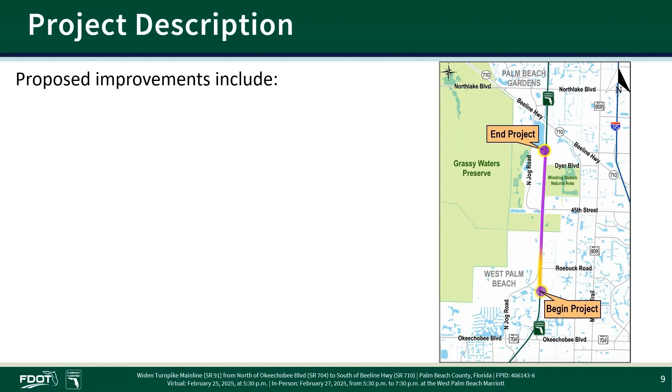The project is located in Palm Beach County, Florida, along the Florida's Turnpike Mainline, or State Road 91, from north of the Okeechobee Boulevard, State Road 704 interchange, to south of the Beeline Highway, State Road 710 interchange. The project will consist of widening the mainline from 4 lanes to 8, and there will be improvements to the 2 cross streets along the project corridor, including Roebuck Road and 45th Street.

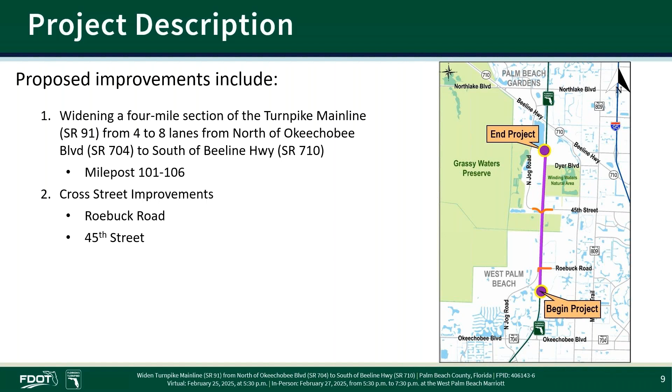This project is following the FDOT project development process. This process includes 5 phases, beginning with planning, project development and environment, or PD&E study, final design, right-of-way acquisition, and finally, construction. The planning phase has been completed, as well as the PD&E study. Our project team is currently working to complete the 3rd phase, final design. During this phase, our project team will be working to implement the original project development and environment study and obtain the necessary environmental permits. The design phase is typically followed by right-of-way acquisition. However, this project requires no additional right-of-way. Construction is the final phase of this project.

In this presentation, we will cover the following: existing mainline configurations, proposed improvements, noise wall policy, and project schedule.

The existing mainline configuration consists of 4 12-foot travel lanes, 12-foot outside shoulders with 10 feet paved, and an 8 to 10-foot inside shoulder with barrier wall separation between the north and southbound directions.

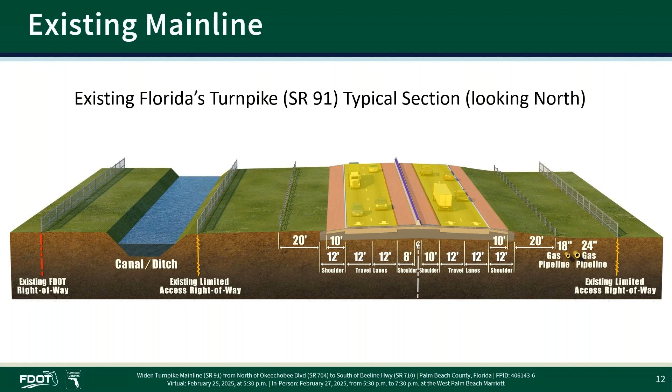The proposed turnpike mainline configuration widens to the west and will consist of 8 12-foot travel lanes, 12-foot outside shoulders, and 12-foot inside shoulders with barrier wall separation between the northbound and southbound directions. The southbound outside shoulder will also feature a barrier wall for most of the project.

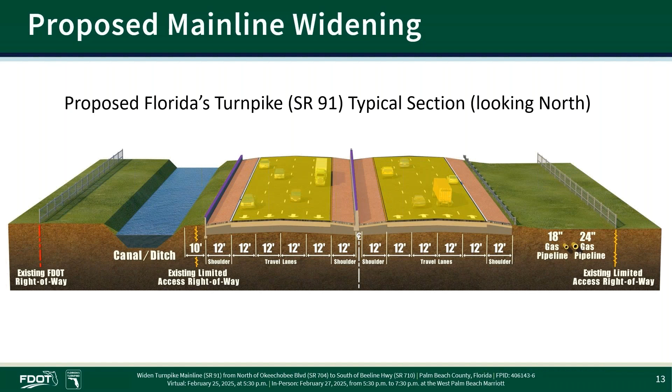Within our project limits, there are 2 adjacent projects. The first is a turnpike mainline widening project, which will widen the turnpike from 4 to 8 lanes and connect to our project at the southern end of the project limits. Construction is anticipated to begin later this year.

The other project is the FDOT District 4's Beeline Highway State Road 710 widening that borders our project at the north end of the project limits. This project also includes widening the turnpike mainline and the reconstruction of the bridge over Beeline Highway State Road 710. This project is currently under construction.

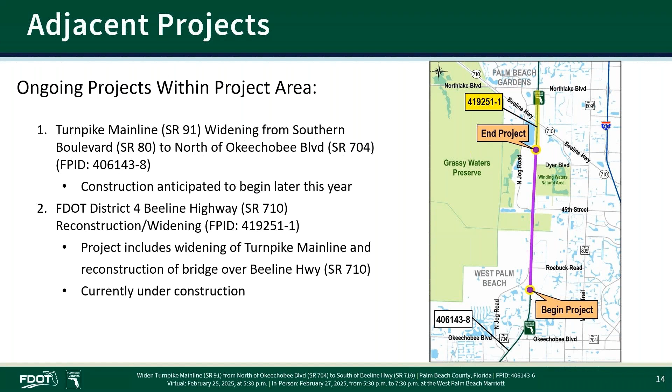With north located on the right side of the screen, starting from the south and working north, the project begins here with the 8-lane widening of the northbound and southbound travel lanes beginning just north of Okeechobee Boulevard, State Road 704. Noise walls will be constructed along the southbound roadway from the beginning of the project to Roebuck Road.

Continuing north, the Roebuck Road Bridge over the turnpike will be replaced, keeping the current 4 travel lanes and maintaining the 5-foot sidewalk on the westbound side of the road.

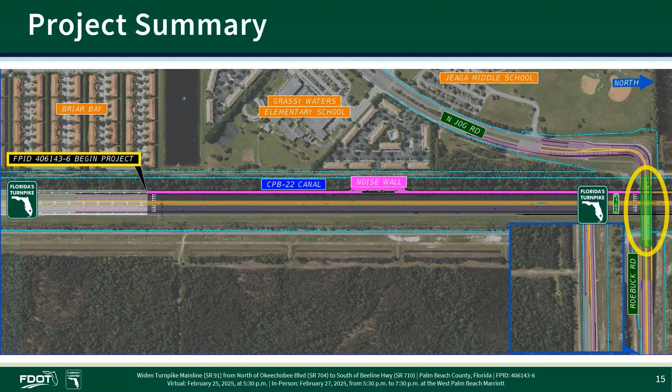Heading north along the mainline, the widening will proceed with the addition of a drainage pond beside the northbound travel lanes.

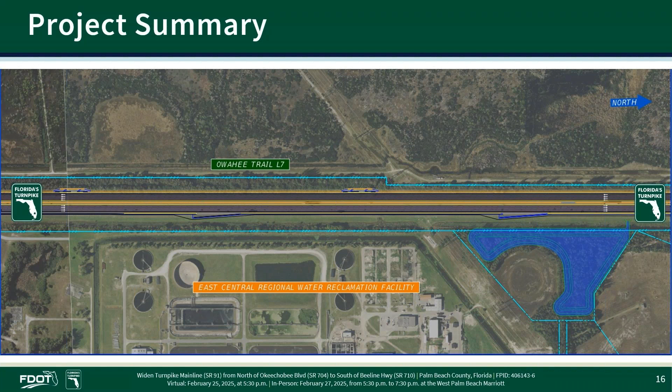Moving north, the widening will continue with the bridge over the City of West Palm Beach M Canal being widened. Additionally, the 45th Street Bridge will be replaced to realign and straighten the road while maintaining the 4 travel lanes and sidewalks on both sides. A drainage pond will also be added beside the southbound mainline travel lanes adjacent to 45th Street.

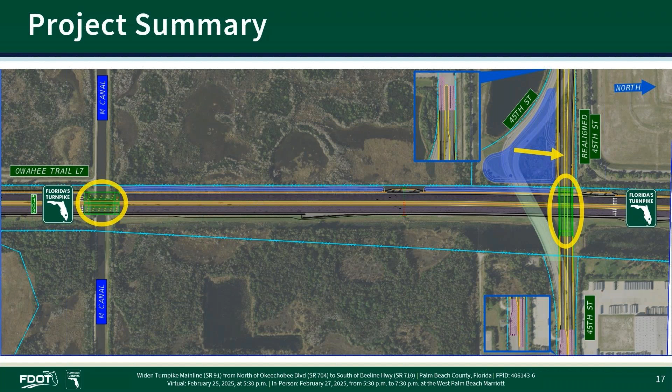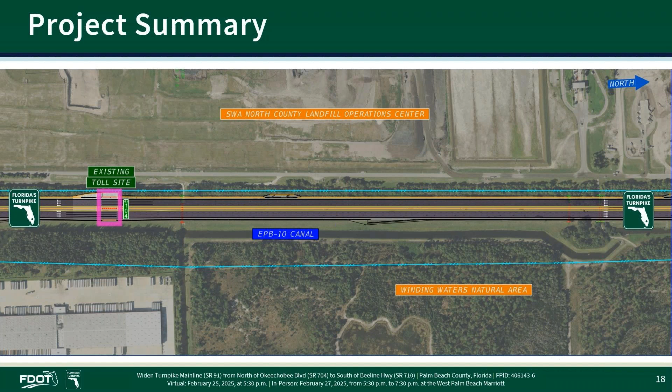The widening continues north, with the existing mainline toll site remaining operational, while the road is expanded to accommodate the new lanes.

The project ends just south of the Turnpike Mainline Bridge over Beeline Highway, State Road 710. At the project's end, the proposed 8 lanes will tie into the 8 lanes constructed in the adjacent project to the north.

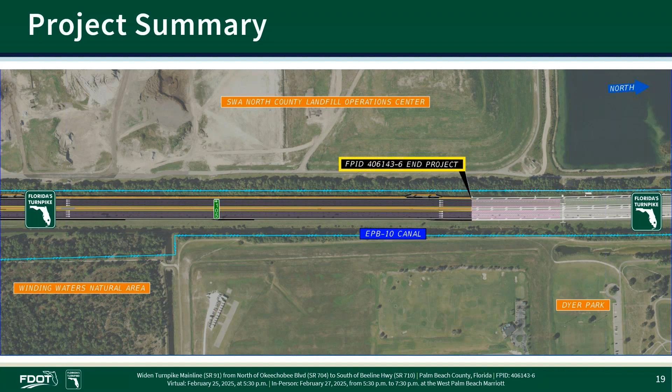In addition to widening, noise walls will be installed in some areas within the project limits. All noise assessments are carried out in accordance with FDOT policy, which is based on federal and state regulations. For walls to be included in the design plans, they must meet FDOT acoustical criteria and must be constructible.

The proposed noise wall locations from the draft noise study are available to view on the boards located within the meeting room as well as the project website. For more information regarding the noise wall evaluation process and approach, please visit the project website to view the Turnpike's traffic noise video.

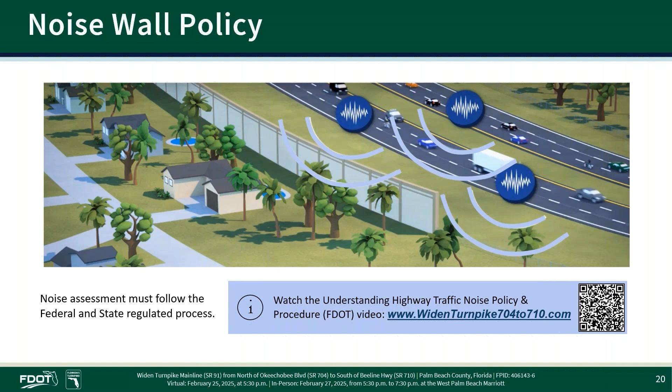When the project reaches the construction phase, signage will be placed to inform drivers of detours before work begins. The project team will continue coordinating with local agencies, businesses, and the public during project construction through the project website, email, and newsletters.

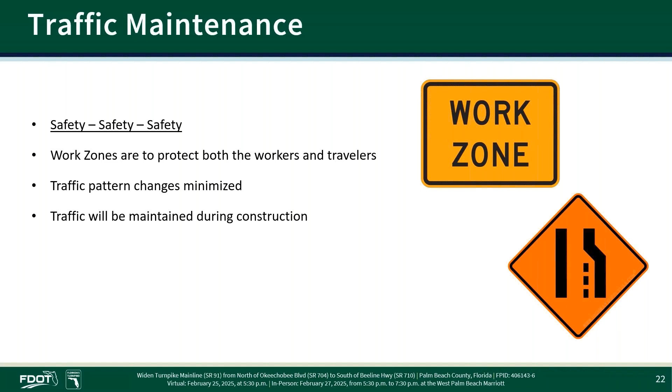Safety is a top priority during construction. The construction along Florida's Turnpike Main Line will be implemented in phases. The work zones within these phases are set up to protect the workers and the traveling public, while minimizing changes to the traffic patterns. Travel lanes will remain open during peak periods with nightly lane closures occurring. Occasional nighttime detours for limited construction activities will be required.

The current project schedule includes the final design being completed in the fourth quarter of 2025. Typically, right-of-way acquisition would occur concurrently with the final design. However, this project does not require additional right-of-way.

Construction from north of Okeechobee Boulevard, State Road 704, to south of Beeline Highway, State Road 710, is estimated to begin in the second quarter of 2026, but the schedule is subject to change. While construction duration has not yet been determined, a project of this size would typically take 4 to 5 years to complete.

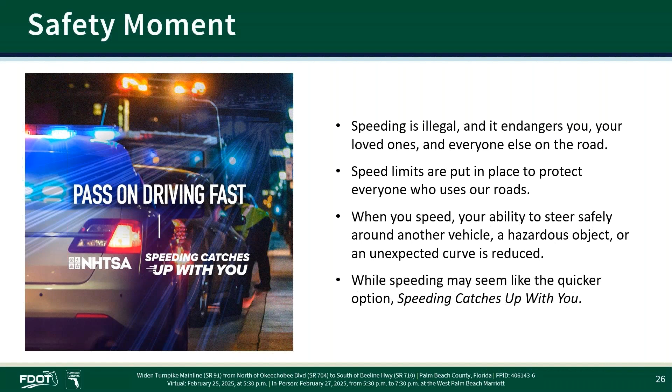Thank you for your interest in the Design Public Information Meeting for the Florida's Turnpike Mainline State Road 91 widening project from north of Okeechobee Boulevard, State Road 704, to south of Beeline Highway, State Road 710 in Palm Beach County.

We hope you found the project information video informative. At this time, we would like to address frequently asked questions about this project. All questions that have been submitted will also receive a response in writing at a later date.

Where can I find more information about the project? All the displays and videos from tonight's meeting are available on the project's website, www.widenturnpike704to710.com. To review the project exhibits, including the presentation, visit the project website and click the Public Meeting Exhibit Room button located at the top of the page.

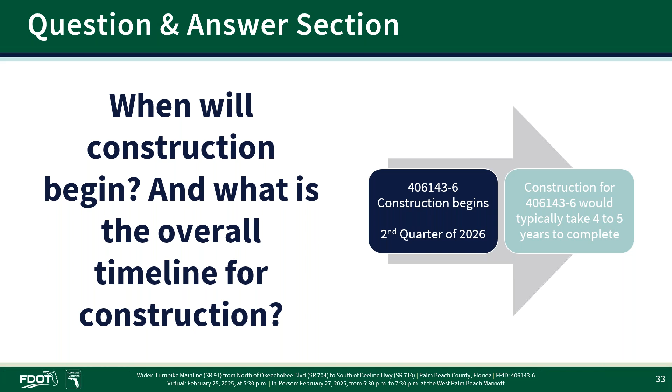That concludes the frequently asked questions portion of the meeting. Please note that all questions and comments received related to this project will also receive a response in writing.